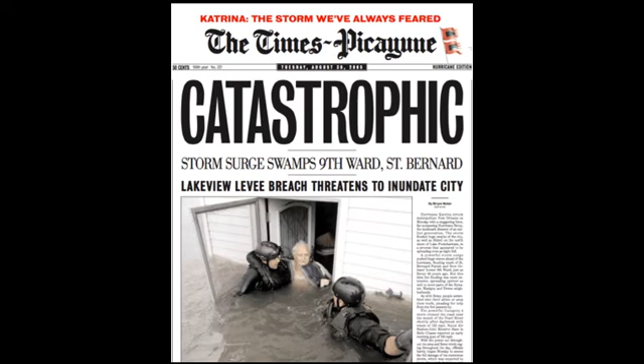People all over the world were in shock and horror as they watched the events of Hurricane Katrina unfold in New Orleans in 2005, with the flood killing over 1,800 people and 130 more reported missing. Some consider it one of the worst engineering disasters in the world, not just because of the death toll, but also because of the aftermath of the damages to the city as a whole.

During the storm, 169 miles of the levees had been damaged, with 50 breaches which increased flooding by at least 300%. After the storm had passed, 400,000 people had ended up fleeing the city, and 125,000 more lost their jobs. Because the city is significantly below sea level, the water had risen to over 10 feet high, ultimately causing over $100 billion in damages.

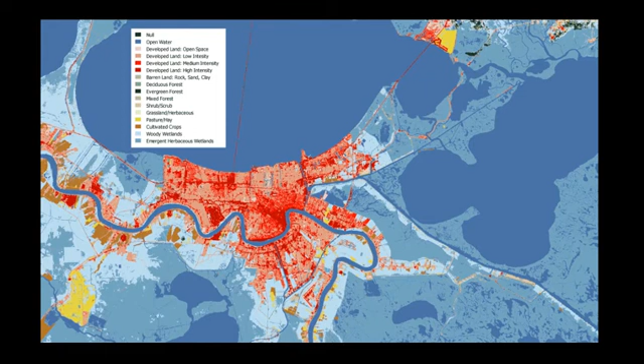In order to understand why the levees broke, we need to first go into the mindset and understand why the U.S. Army built the levees like they did. First of all, they were already in a tough spot. The areas that the levees surrounded used to be swampy forests with very soft and unsupportive ground. Building a structure that was supposed to hold off tons of water has to be carefully built with that in mind. However, the U.S. Army did not take that into consideration. They did not realize that ground that soft would eventually give and ultimately sink if a heavy structure is lying on top of it.

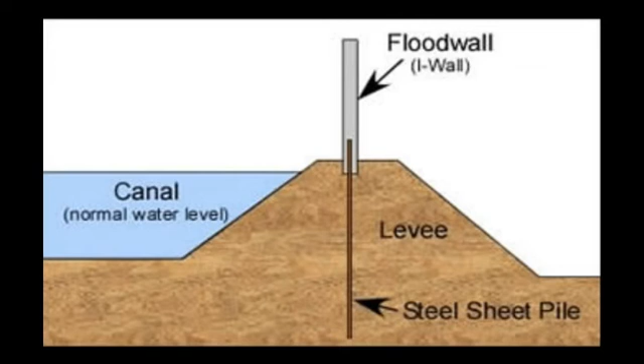Second, because of their restrictive budget, they only built the levees with low stress levels, designed to withstand only a subpar Category 3 hurricane. Little did they know that Hurricane Katrina was not that. Hurricane Katrina was listed as a Category 5 in the Gulf of Mexico, but when it hit land it quickly was reduced to a Category 3, still being geographically massive in size and strength, creating storm surges stronger than what the levees were built for.

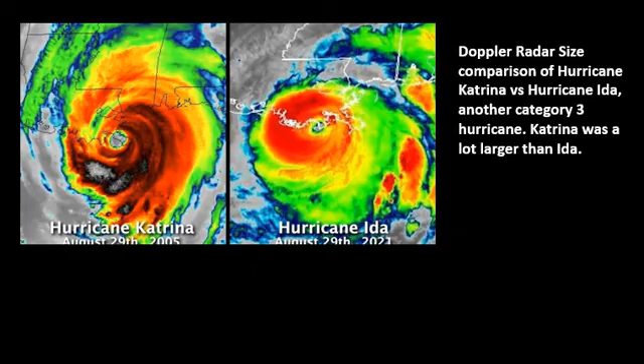On the day Hurricane Katrina hit, the storm surges were so strong that the design they had for the levees could not withstand the strain of the rising water. Combined with the already unstable and sunken ground and the lack of strength of the levees themselves, they began to tilt, causing the water to overflow on top of the walls and in between the levees and the ground it was built in.

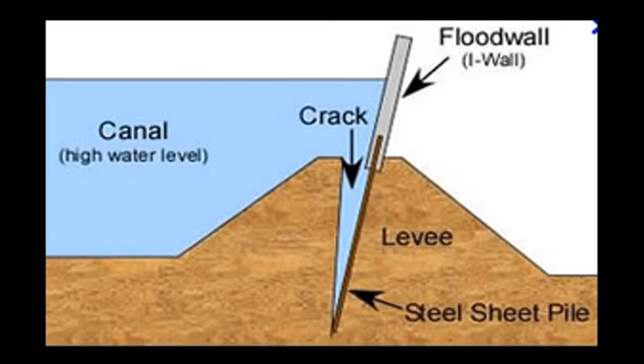Because the levees were not built with this type of storm in mind, the storm surges eventually pushed the wall over, toppling it and releasing tens of billions of gallons of water onto the unsuspecting city of New Orleans, killing over 1,800 people and covering around 80% of the city.

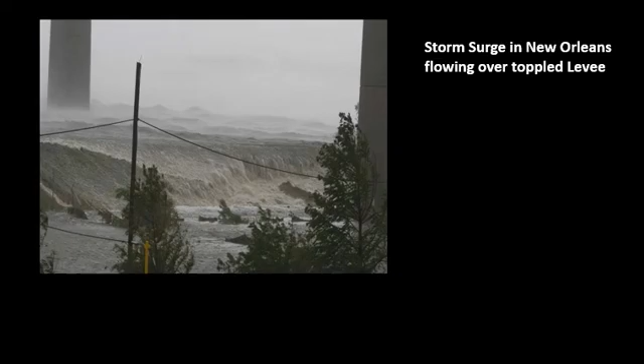So what could have been done differently to prevent a disaster like this from happening? A big reason why the levees were so weak was because of erosion. The Army had built the levees out of materials such as concrete, sand, and other easily erodible materials. What they should have done was look for materials that do not get easily eroded.

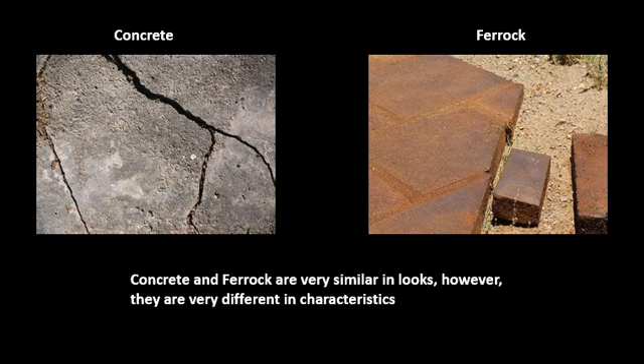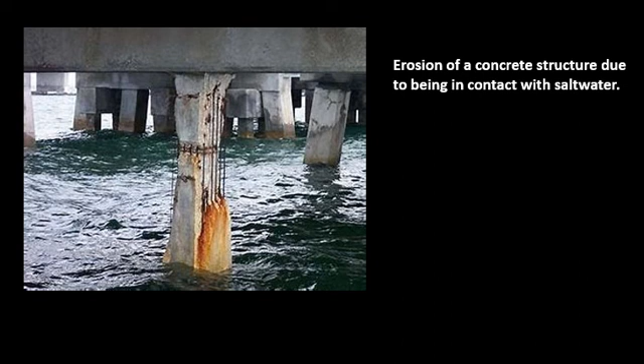A new material founded in 2002 is Ferrock. Ferrock is proven to be almost 5 times stronger than regular concrete. One of the biggest issues with concrete is that it slowly erodes when it comes into contact with salt water. This new material, Ferrock, does not - it actually gets stronger when it comes into contact with salt water. Being founded in 2002 should have given the city of New Orleans and the U.S. Army enough time to at least rebuild and strengthen the critical points of the levees that were in most danger.

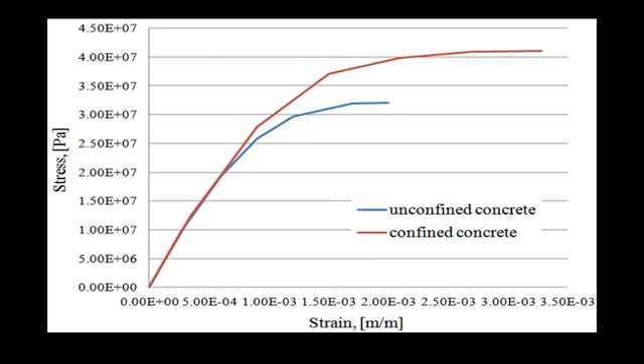In this graph, we can see concrete's limitations on stress and strain. Since Ferrock is proven to be 5 times stronger than concrete, we can determine just how its numbers line up to the concrete's by looking at this graph.

A mistake that could have been fixed in the beginning is using clay instead of sand and seashells. Heated and hardened clay is very hard and much more resilient and resistant to erosion, whereas sand is very loose and can easily be washed away. If the Army had realized that using erodible materials such as sand and seashells would lead to the demise of the city, maybe they would have chosen different materials to build the levees out of.

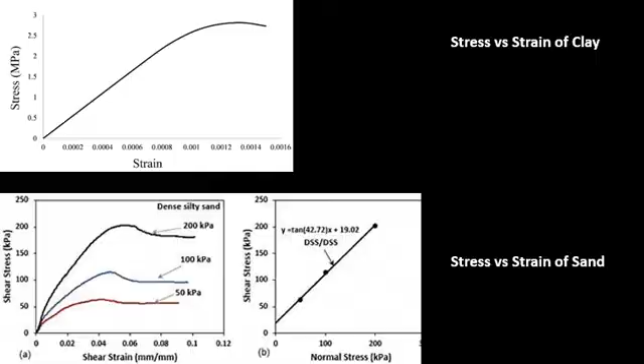Since Katrina hit in 2005, the city of New Orleans has rebuilt and reinforced the levees. However, they still use a lot of materials that would be disastrous if any storm produced storm surges as big as Katrina. Since then, they have strengthened their levee walls by using a mixture of earthen and concrete materials, as well as improved their water pumps.